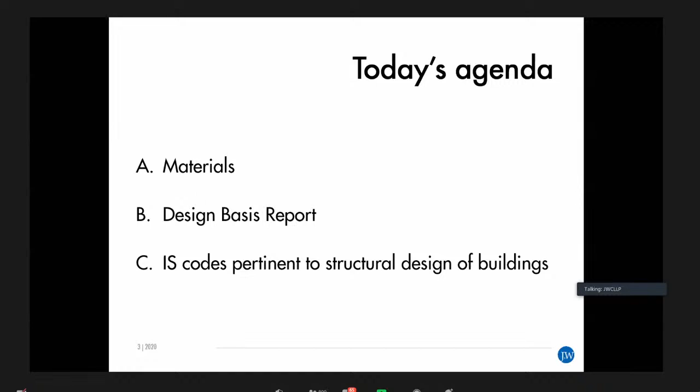As I had explained initially, we will restrict ourselves to the concrete and reinforcement.

For the sake of formality, we will define concrete: concrete is a mixture of cement, fine aggregate, coarse aggregate, which is mixed with water and obviously air. And of course, nowadays concrete is not complete without the mention of admixtures. Admixtures have become an integral part of concrete, and that is essential because, when I started working, say 40 years before, admixtures were hardly used, except for certain elements used for quick setting concrete.

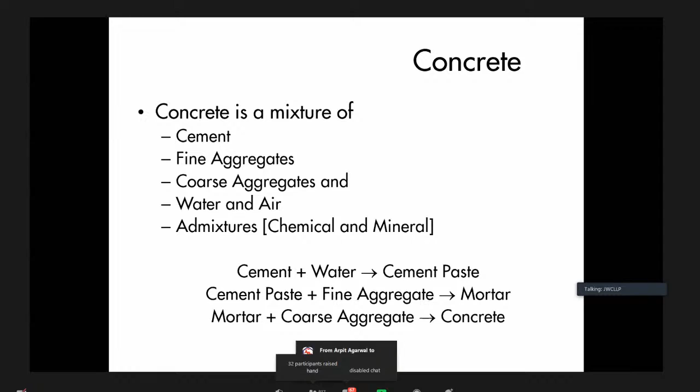So when we talk of concrete, we make it into three parts, or we will go step by step. When you add water to cement, we get what we call cement paste. That cement paste, when mixed with fine aggregate, gives a second stage element usually called in our engineering fraternity as mortar. And when this mortar is combined with coarse aggregate, it takes the form of concrete. So we use all three materials in different forms.

Only cement and water is often used for purposes of grouting. Cement paste and fine aggregate is used other than for structural issues, such as bedding material, rendering material like plaster, bonding material in masonry. Once we add coarse aggregate to it, we start getting structural concrete in place.

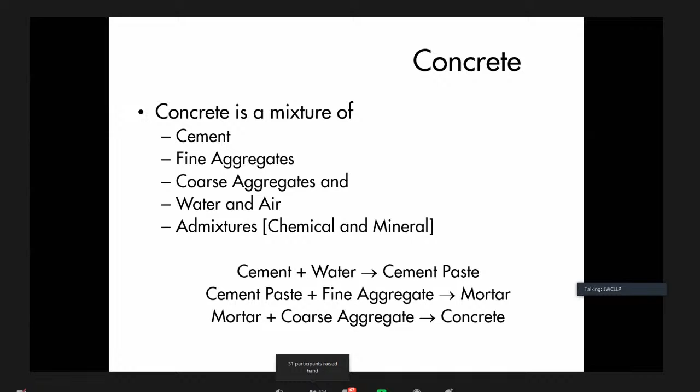The usually available cements are ordinary Portland cement. These are Portland cements which are actually called hydraulic cement. When we say it's a hydraulic cement, it means that when you add water to it, it will create an exothermic reaction, and that exothermic reaction will harden the cement paste. Cement essentially consists of limestone, clay, and iron ore, which is blended and heated in a kiln to a temperature in the range of around 1200 to 1500 degrees centigrade. This clinker is then ground in a cement plant to the consistency of a powder, and gypsum is added to control the setting time.

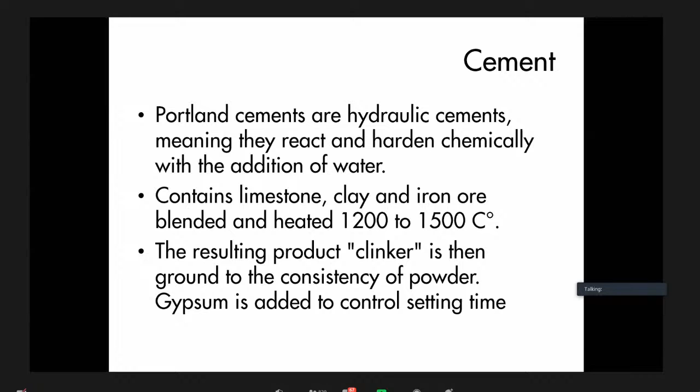It usually has a very fine particle, and the standard size is below 50 micron. The types of cement are listed in my presentation. As I said, we ordinarily use ordinary Portland cement in most constructions. We tend to use sulfate-resisting cement, mentioned in category D, where we are expecting certain attacks because of chemicals present in air, like chlorides and sulfates. Then we get slag cement, quick setting cement, super sulfated cement, which have applications in different sets of atmospheric conditions.

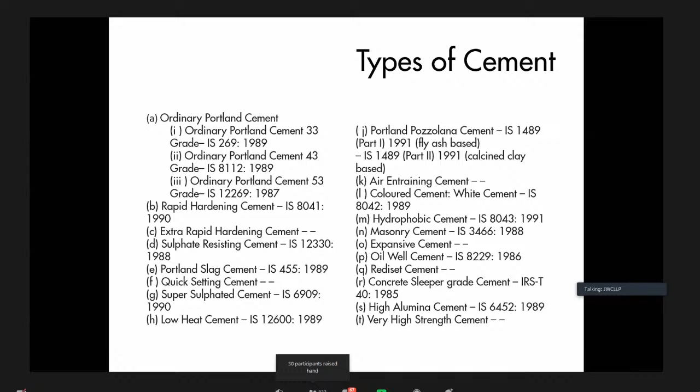Now, what is the role of cement? Before we go to the strength of the cement, let's understand the reaction of hydration. Here, C in the equation means CaO, S denotes silicon dioxide, SiO2, and H is obviously H2O. So there's a two-stage reaction, as given on the slide, and both reactions create CSH gel. This CSH gel is considered to be the hardened cement paste, which will impart strength to concrete. We will dwell on this in detail slightly later.

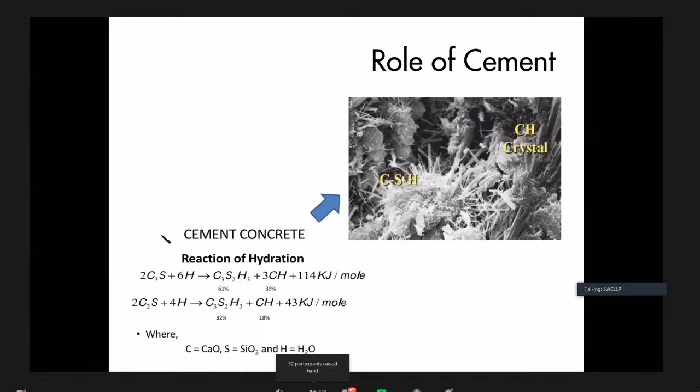Now, when the cement arrives on site, you need to ensure that it complies with the standards required. So we do field testing by taking it in hand, rubbing it, and checking the heat of hydration. A simple method is to take a fistful of dry cement and dip your fist into a bucket of water. What you should feel is a heat of hydration—a good amount of warmth in your hand when the cement is immersed in water. This ensures that your cement is capable of giving an excellent exothermic reaction.

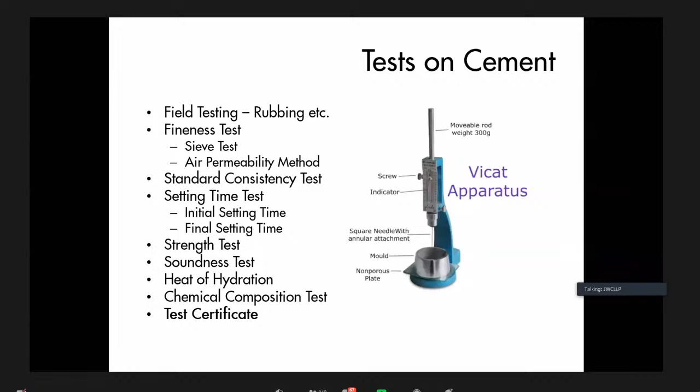Then we talk of coarse aggregate. The coarse aggregate, along with the cement paste, imparts strength to concrete. Usually, by weight, the content of coarse aggregate would be in the range of around 40 to 45%.

The standard definition of coarse aggregate is all aggregates bigger or larger than 4.75 millimeters in size. Obviously, there will be a restriction on the upper size limit. When we say 20 mm down-graded aggregate, the maximum size will be 20 mm. If we say 40 mm down-graded aggregate, the maximum size will be 40 mm. In most structural concrete used in buildings, we use 20 mm down-graded aggregate, meaning no particle size will be bigger than 20 mm.

Of course, the Indian standard allows up to 5% of particles to be bigger than 20 mm, but that's just a variation. Usually, the standard size of particle would be 20 mm and not less than 4.75 mm, which is classified as coarse aggregate. This is usually known as gitti or khadi in Marathi.

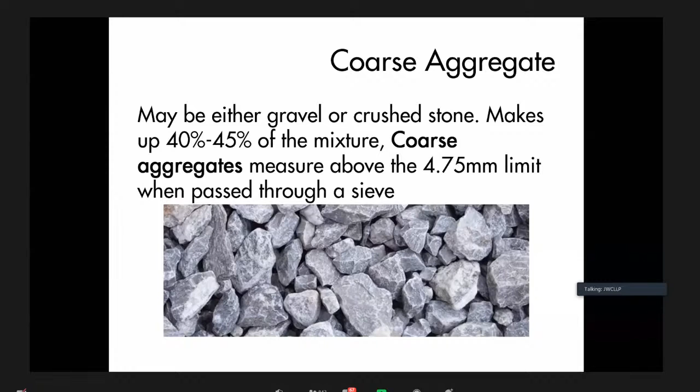The most important feature of coarse aggregate to keep in mind is observing the size and shape of the material. I'm not going through all the tests required, but importantly, your coarse aggregate should not be flaky or too much elongated. Because instead of getting a rounded or squarish aggregate, which is very difficult to get, if you get a flaky or highly elongated material, shear failure during loading of the concrete becomes inevitable.

When the concrete fails, it may not be by mortar failure, but by aggregate failure. And we certainly do not want the concrete to fail due to aggregate shear characteristics. So we need to entirely avoid flaky aggregates while using them on site.

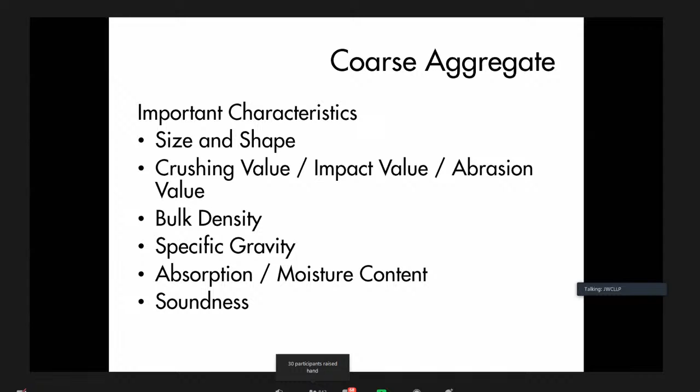These are the grading limits given in IS 383. For one who desires a career in concrete technology and mix design in particular, this IS 383 will form the basic foundation for coarse aggregate, and you will have to select your gradation of aggregate depending upon this table.

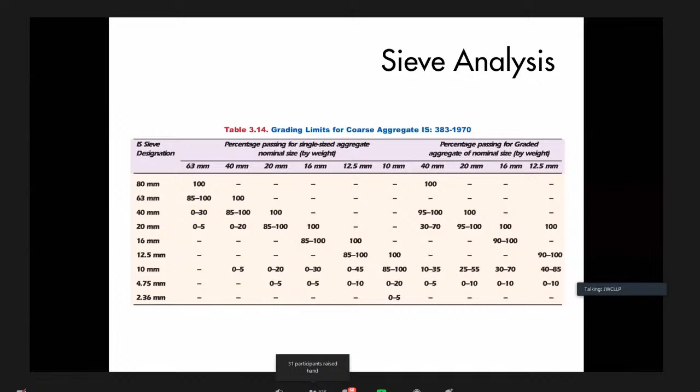I'll come to fine aggregate. Fine aggregate is what we usually call sand, and that will be between 4.75 mm down to 150 micron. Anything lesser than 150 micron, the quantum of that particle size below 150 micron will have to be limited, and it should not be more than 7 to 10%, because otherwise that will come in the form of stone dust. So we will have to necessarily control the particle size less than 150 micron.

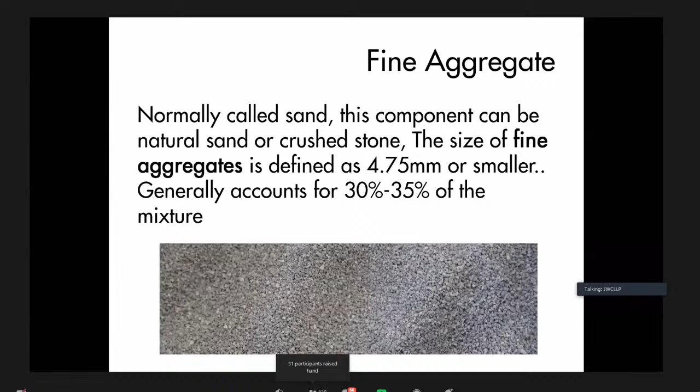These are the grading limits, again specified by IS 383, and these are the grading limits for all-in aggregate, meaning the fine aggregate and coarse aggregate put together. So these are the limits which have been specified by the IS code.

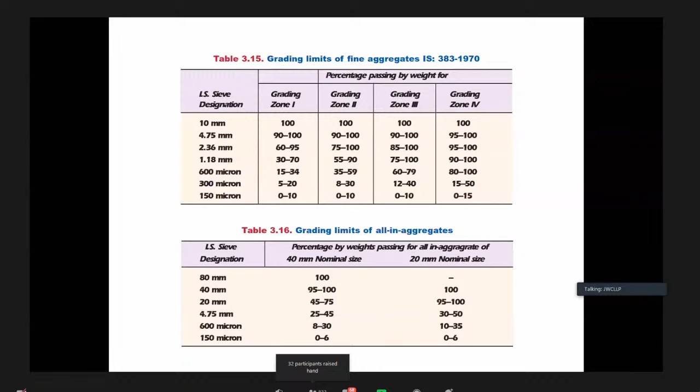The reason I'm talking about all this is that my observation in the field is that the best of structural engineers tend to disregard the material properties of concrete because they believe it is best left to the site engineer. It should not be done so, because finally, whatever best design you might produce, if you do not pay attention to the quality of material being used and the way in which it is used, the end result will not be desirable.

So most structural engineers and civil engineers working on site will have to be acquainted with concrete quality and concrete theory, because nowadays people have started saying that what is taught in college is not utilized in the field.

No, it's absolutely wrong. We tend to forget what is taught in college, and we tend to carry an impression on site that the practical field is entirely different. No, honestly, when you marry the practical field with the theoretical study that you have made, then it will render excellent results on site.

We usually use two kinds of terms: one is poorly graded aggregate, and the second is well-graded aggregate. It is very simple - if you have only coarse aggregate and cement, there will be a lot of gaps left in between which are filled by cement paste, and obviously this will weaken the concrete matrix against shear failures.

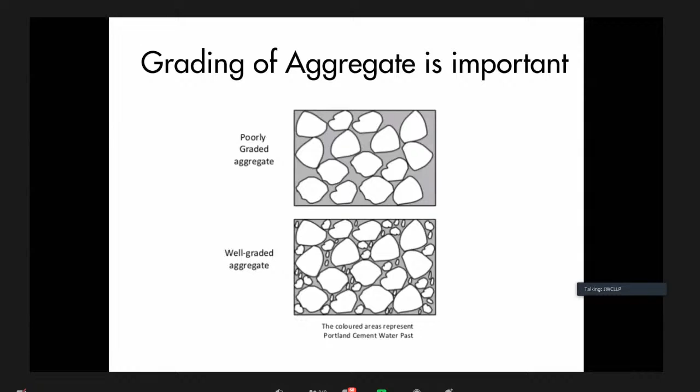I'll come to one more chapter. I'll be very honest with you - till 2000, in India, we were hardly using any mineral admixtures. Now, Sandip Polytechnic comes from Nashik, and Nashik is the basic source for fly ash, which is produced as a byproduct in the thermal power plant. It comes out of an electrostatic precipitator, which are now fitted to the boiler outlets. This fly ash was considered a waste material till 2000, but it has a fantastic advantage when it is properly and scientifically utilized in concrete mixing.

As a matter of fact, if you study the theory behind this, you will understand that mineral admixtures have now become part and parcel of the concrete mix, which will render a durable concrete. I will go a step further and say that ideally, one should now avoid using only OPC cement - OPC cement will have to be blended with one of these mineral admixtures. Why? We will see it in the next slide.

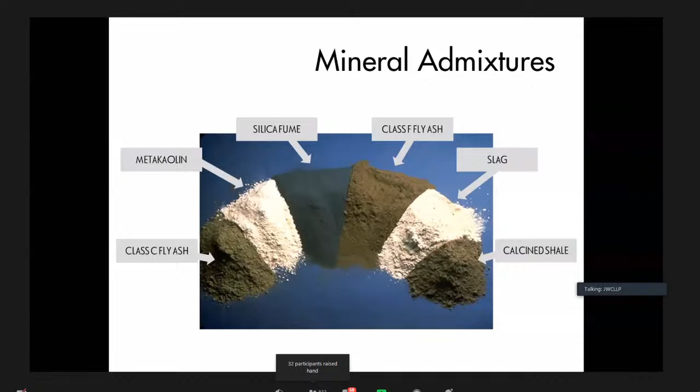Now we talk of silica fume. Silica fume is a much finer material, and this is usually used when we want to get a higher grade of concrete. That means fly ash would be good enough for concrete up to M30, M40, M50 grade, but if you want to go to a higher grade like M60, M70, M80, and gain that strength by controlling the cement - because as you all are aware, we are not allowed to go beyond 450 kg per cubic meter as cement content because of shrinkage problems - in this case, silica fume will come to our help, and with the same content of cement, because of the reaction that I will explain further, we are able to get a much better strength.

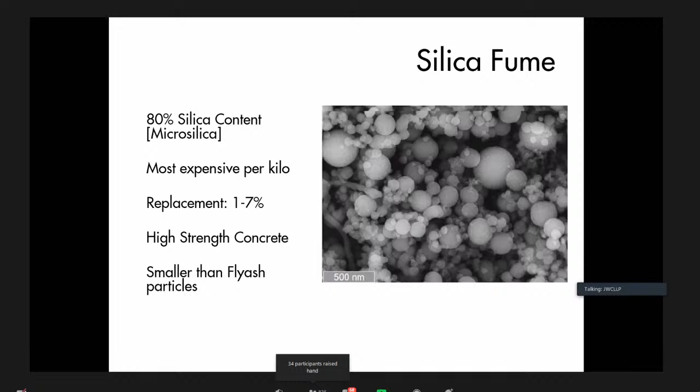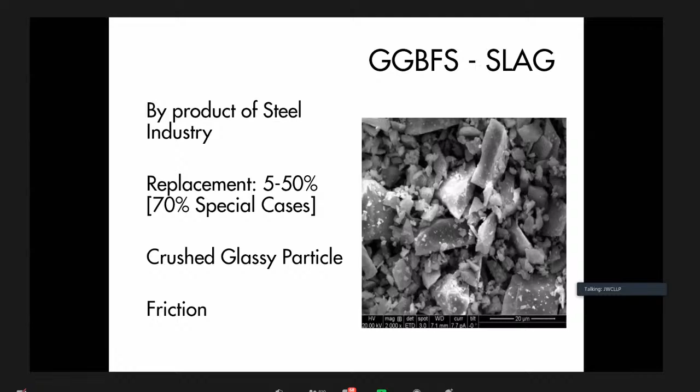This is another class of mineral admixture called ground granulated blast furnace slag, or GGBS. This is a byproduct from steel furnaces. It was also being treated as a waste material in the initial period, but it has similar properties to fly ash in that it tends to enhance the quality of concrete. These are various pictorial descriptions of how GGBS elements tend to mix with concrete.

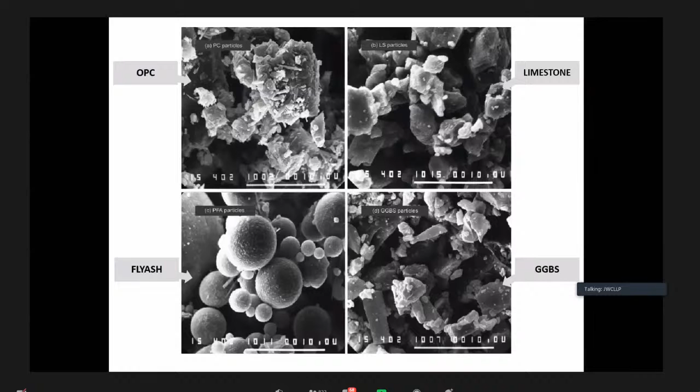Now friends, please pay attention to this slide because it will explain why we need to utilize mineral admixtures. The basic chemical reaction when we add water to ordinary Portland cement gives us a C-S-H gel, as we have seen in the first slide, and then we get a primary subproduct as calcium hydroxide, that is plain lime.

Now, whenever we are not using these admixtures, if you see a strengthened or dry concrete, you will find leaching in the form of certain white material coming out of concrete after 3 or 4 weeks. This is exactly the calcium hydroxide which tends to come out of various voids left in concrete. This lime eventually comes out and vanishes over time, leaving voids or pores in concrete, which makes concrete porous.

Now, what exactly will happen if the concrete becomes porous? That will allow water or moisture and other gases to enter the concrete. In a place like Nashik and Pune, we are comparatively better placed because we do not have saline conditions, we do not have sultry conditions, and we do not have chlorides or sulfates in the air.

But in coastal areas, in a place like Mumbai, Calcutta, or Chennai, where chlorides and sulfates are present in the air, these chemicals tend to enter through these pores. This air entrainment with chemicals eventually starts corroding the reinforcement within the concrete. Now, when this corrosion starts, as everybody knows, the reinforcement under rusting will expand in its volume.

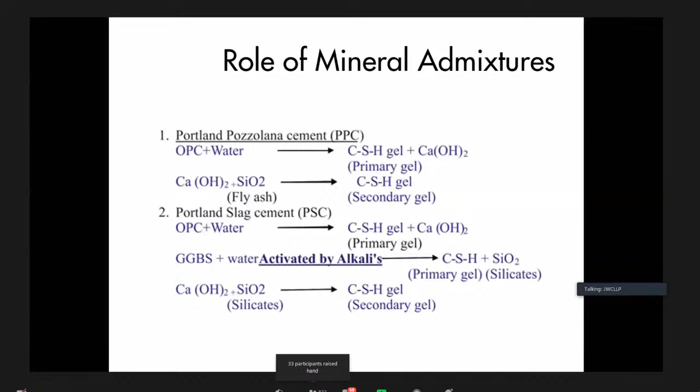Now we will go to further admixtures, such as shrinkage reducing admixtures, water reducing admixtures, foaming agents. You will understand their application as and when you go with some special kind of concrete required for equipment foundations, certain amounts of grouting, and certain high criticality turbine foundations, so on and so forth.

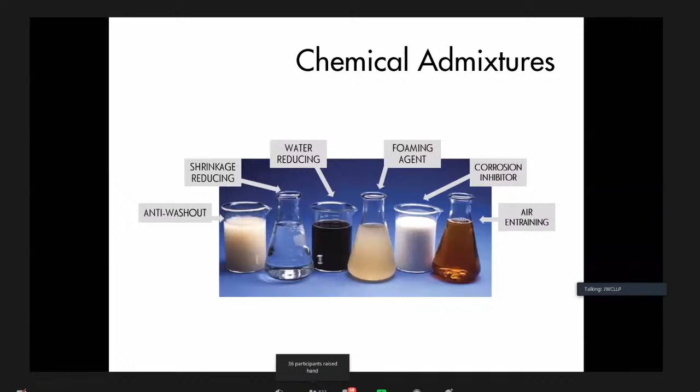Now we will briefly touch upon reinforcement, since we've covered concrete. Concrete, as you all know, is good in compression but weak in tension. So when creating a reinforced concrete element, we need another element which is strong in tension and shear. That's why this is a composite material, used in the form of RCC. All of you know that reinforcement comes in two different types.

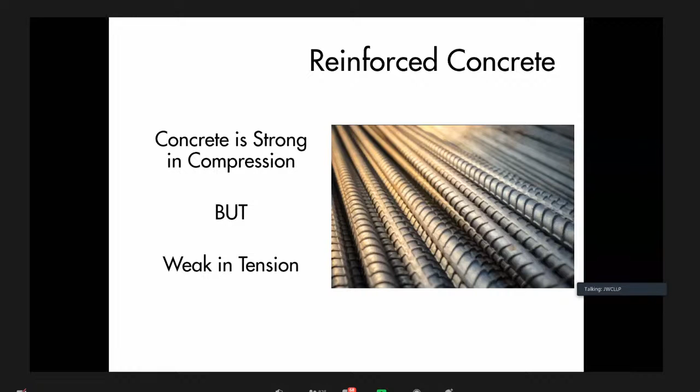When I was in college in the 70s, we didn't have high yield strength bars. I possibly did all my education with mild steel plain bars. While I was finishing education, HYSD started coming into the market, and that was always of the grade Fe415. But now we are fortunate to get grades of steel up to 500, 550, and 600.

You also need to understand that all of a sudden we should not start using 600 grade, because using this 550 or 600 grade means we have a yield strength of 550 MPa or 600 MPa. But to match that strength, we need to use it with a high grade of concrete. Please do not use 550 or 600 grade with a low grade of concrete like M30, M35, M40. If you want to go to 550D, for strain compatibility, you need to ensure you are at least going to M60 or M70 concrete.

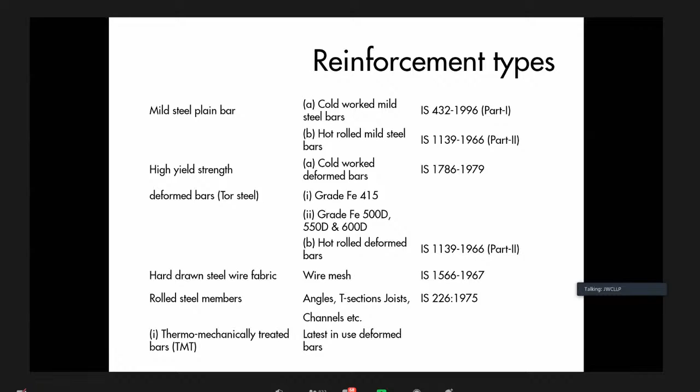While using the grade of steel, we have to also bear in mind that for Fe 500 and above, in order to retain ductility, we have to have a percentage elongation of at least 14.5. Because IS 1786 says that for Fe 500, the acceptable percentage elongation is 12%. But when we have to design the structure in seismic areas for the ductility requirement, our percentage elongation has to be 14.5% minimum. So that is something we have to bear in mind.

And usually it is rendered by this thermomechanically treated, TMT category reinforcement. It's a different metallurgical treatment, but which gives you a higher percentage of elongation.

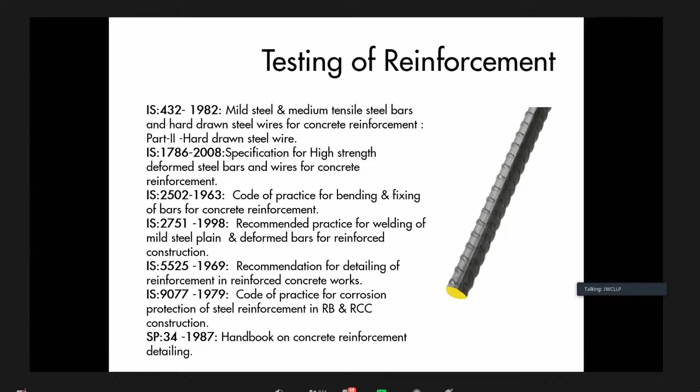So this is a brief touch down on the materials part that we essentially, as a designer, need to know. Obviously today I'm not going to concentrate on the construction aspect. I am going to restrict my presentation to the design aspect, and that's why in the materials part, I have dwelled only upon the properties of the material that we have to bear in mind in order to fit into the correct design procedures.

So what I am doing, all of you must have gone through various IS codes or must be in the process of going through various IS codes. So I am not making a particular reference to one IS code, but referring to all the IS codes together when we take up a particular design of a building.

Now, for the sake of example, I have picked up one of my projects where the design is in process. And you will ask me why this. As I said, I have purposefully picked up a building which is 240 meters high. Obviously, I know not everybody will get to design a building of this kind. But if your horizon is wider, if we start thinking in terms of tall buildings in the first place, then you will start thinking on various different aspects of design much more purposefully, because a shorter building of 5 or 6 stories might not have so many complications.

Our next is IS 875, Part 1, Part 2, Part 3, and Part 5. All of us know that when we talk of a building, we design it, we put strength of concrete, we put reinforcement, because it is subjected to inertia forces, gravitational forces, and lateral loads like seismic and wind. So we need standards which define various loadings that we should adopt.

There are various loading standards. IS 875 Part 1 gives you the unit weights of each building material. IS 875 Part 2 gives details of the imposed loads, or what we commonly call live loads. Then Part 3 gives the wind loads, which tall buildings are required to be designed for, and Part 5 gives the special loads. These are the four important codes we need to go through.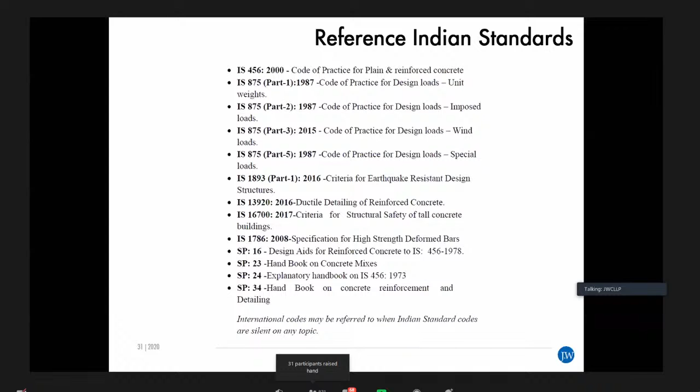And then you will have to create a description. So that's why I will go to the earlier slide, that you will have to define the building. If you see the functional requirements, this building has details that it has one basement floor of particular height, then a ground floor, then a first floor, then second floor of different height, which is used as a service floor. Then there are third to 44th floor, which are typical floors, residential floors.

Then there are fire check floors. There are different clubhouse floors. So when I'm saying I'm preparing a statement, your statement per se should be able to speak or give a volume of the data in terms of that building. So this is something which is essential to be created so that anybody as a third party going through your design basis report is able to visualize the building.

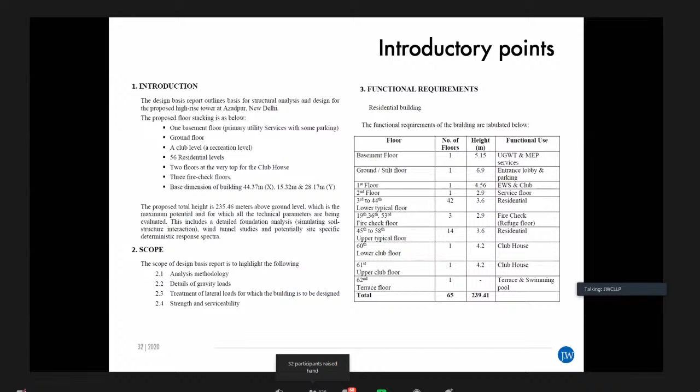So this is the framing plan that we talked of. This is just for the information sake. This is the stacking plan, how the building will look in section. And this is an architect's view in terms of its perspective.

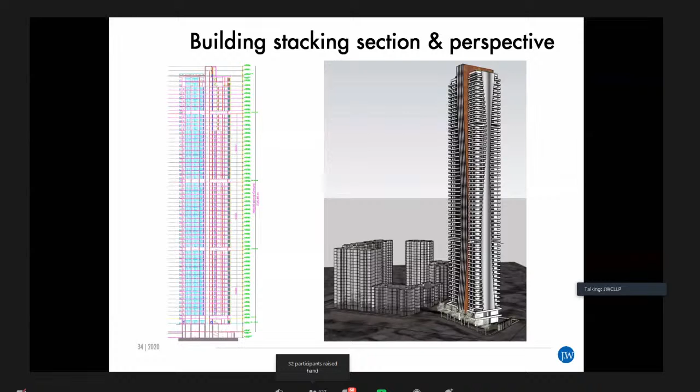Now, these are the design criteria. As we had talked about materials, in the design basis report you will have to specify the kind of cement that you intend to use, the aggregate that you will intend to use, what is the maximum aggregate size that you will employ, and what admixtures you intend to use.

For a building of this nature, your grade of concrete will be M70, as you see on the slide. For M70 concrete, the correct selection of mineral admixtures as well as chemical admixtures is most important. That's why you need to examine the appropriateness of the admixtures you will utilize, and that mention has to be made in the design basis report.

And the reinforcement grades also, because here you will have a wide choice. You are talking of a very tall building, so you can go from FE 415, FE 500, FE 550 to FE 600. So here we had made a choice of using 550 and 415 grade materials, and that is something we will list out.

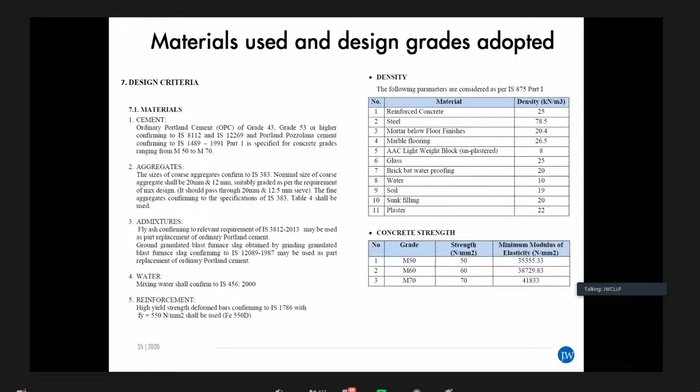Now obviously the problem will come. So far we have not talked about foundations. I will just briefly touch that a building will have a very high capacity requirement in terms of the safe bearing capacity from the soil, and unless you have an extremely hard rock able to give capacity in excess of 200 ton per meter square, otherwise you will be required to go for piles.

Obviously this building that we are designing in Delhi has a lot of alluvial deposit, so there is no question of getting a hard strata. So we had decided to go in for piles. We have defined the piles, the reinforcement, the link beams and the shear walls, and the floor-wide distribution of various grades of concrete can also be shown.

Again, I'm emphasizing that this design basis report is most important, because this documentation will speak about the details in terms of the thoughts you have given to designing a building. That means somebody who has not been part of the design team, if handed over this document, should be able to visualize the way in which your thinking process has gone about.

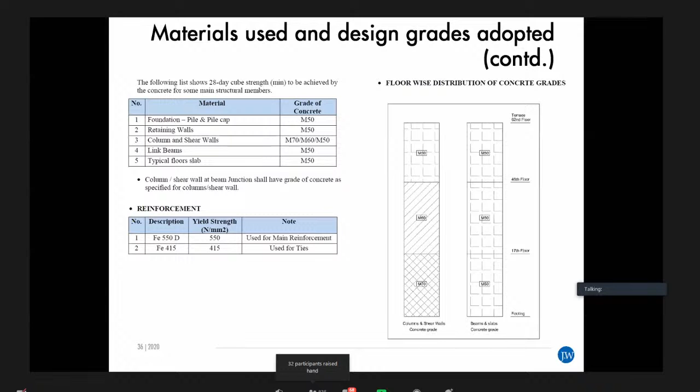Now this will give you various concrete elements and the serviceability conditions and the exposure conditions. So what are the nominal covers that we are adopting, and what are the exposure conditions that we are talking of? And the fire rating is most important.

That is one part which was previously being ignored, but is now emphatically included in all design basis reports. With so many frequent, unfortunate incidents of fire, the fire rating of a concrete element is a most important part of your design basis report, and that is something you should always include and pay adequate attention to.

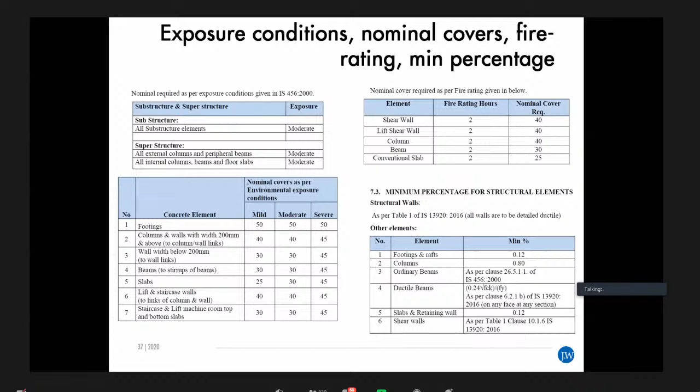This is some minimum percentage of the reinforcement that we will employ in our elements. And now we will have to create a note when we are designing a building, you will have to create some kind of a note.

Of course I have not burdened this presentation with the kind of note that we prepare, but what I'm saying is that we will need to prepare a clear note on the philosophy of the structural framing - that means the way in which we have visualized this building will resist.

As I have been taught in my early years, it's very easy to design a building. Somebody who understands how a building will fail for a given loading condition, if he knows the mode in which the failure will occur, the job is very simple. You need to strengthen those portions which will become critical or which will become a weak link - those weak links you will have to eliminate.

So your structural framing will have to be done in such a way that you are able to establish a very clear load path without any unnecessary gimmicks, so that the gravity loads are transferred from the top to the foundation. And not merely gravity loads, I'm talking of the lateral loads also.

Here and after in my presentation, when I'm talking of lateral loads, we have to keep in mind that I'm talking of either earthquake load or seismic load or wind load. Obviously we will not assume seismicity and wind event to act together, so it is either or - either the structure will be subjected to seismic load or the structure will be subjected to wind load. So that is something for which we will have to establish a clear load path.

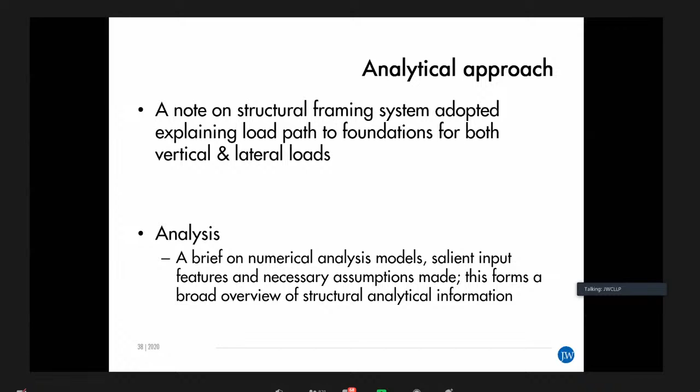Usually, for the sake of correctness, each floor will be subjected to different kinds of loading. Your parking floor will be subjected to different live load, your commercial floor to a different live load, your residential floor to a different live load, your workshop floor to a different live load, your service floor to a different live load. So floor-wise, you will have to enumerate the kind of loading that you have assumed.

Second is what we call superimposed dead load. What is superimposed dead load? It's kind of a filling that we make in a toilet block. You know the toilet floors we leave sunk, then do the waterproofing, fix the fixtures, and then fill it up. So your toilet loads could be higher. There could be 200 millimeters of filling.

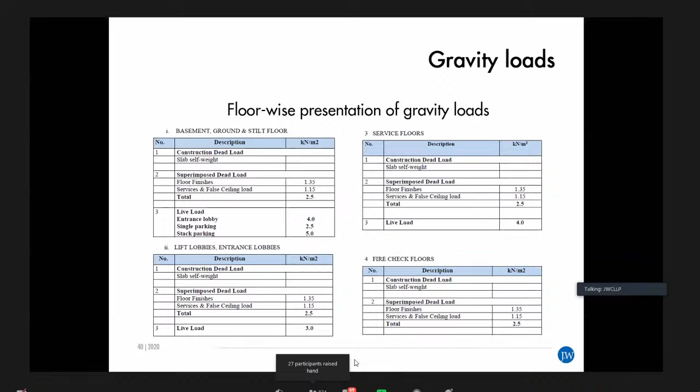And obviously live loads I have explained to you earlier. Now these are floor-wise presentations of the gravity loads - dead load, superimposed dead load, and live load.

Obviously then the slabs will have to be designed for fire tender movement, because most buildings have podiums and fire tenders have to be allowed to move around to take care of firefighting requirements. Those firefighting slabs are designed for much higher loads, and that tends to get missed out because architects and fire consultants do not specify the fire path. So we need to ask architects specifically to tell us the fire path, so that we are able to design those slabs for higher loads.

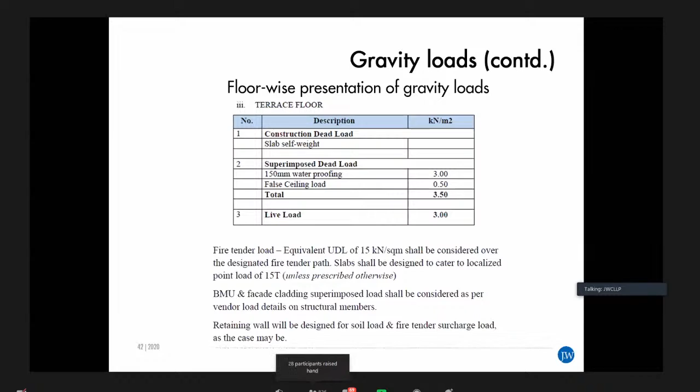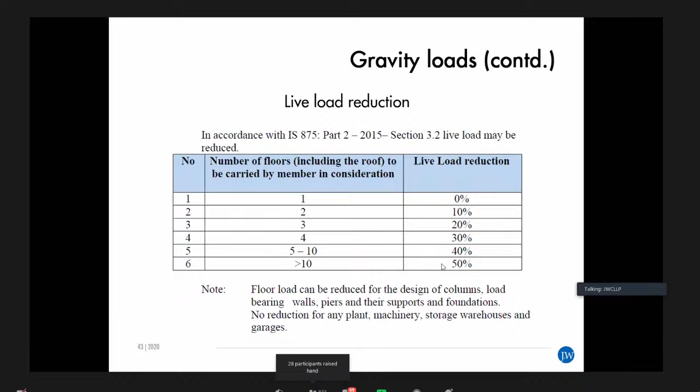IS 875 Part 2 always allows live load reduction. Even though we consider full live load, it is assumed statistically that when the building is complete, all floors may not carry the full live load. So depending upon the number of floors in the building, you are allowed to reduce the live loads assumed in your calculation. These are the percentages of live load reduction you need to account for optimal design of a building.

When it comes to partition wall loads, you will have different kinds of materials: conventional bricks, lightweight bricks, dry walls, Shera walls. You need to define what material you're using. If using an ordinary brick, you'll also have to ask whether you're doing a normal neeru finish plaster or only gypsum, and what the thickness of the plaster will be. Accordingly, you utilize the loading pattern onto that masonry so the proper load is accounted for.

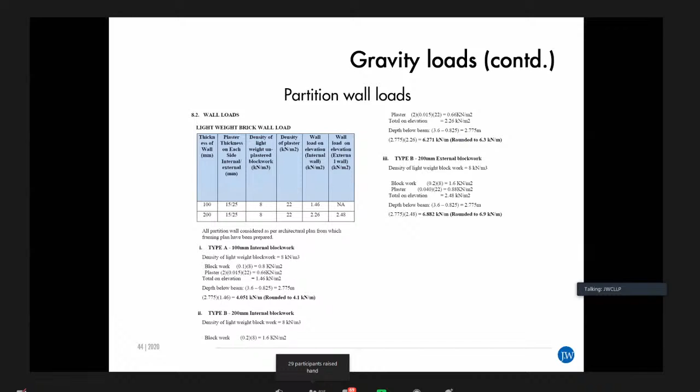This is something we had referred to already, so we'll skip it. This is all about gravity loads. Now we will come to part 1 of the lateral load.

We are going to briefly talk about wind loads. For the wind category, this is part of IS 875 Part 3, 2015 code. The country is divided into various zones where the basic wind speeds are defined. For our consideration, Mumbai is in a zone of 44 meters per second as the basic wind speed.

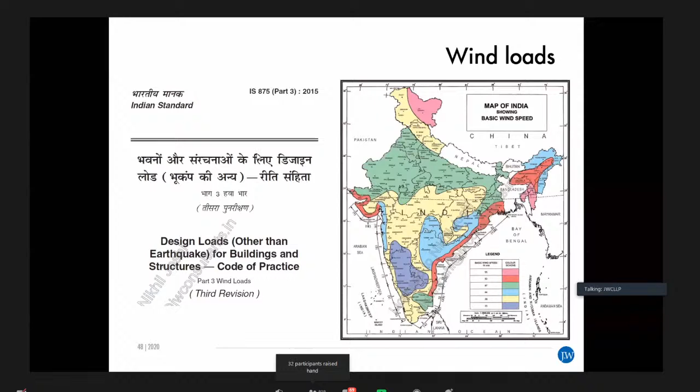If you come to Pune and Nashik, that would be in the range of 39 meters per second. If you go to Bangalore, that could be 33 meters per second. Depending upon various wind data collected over years, this is the wind climate diagram for our country as a whole. So this is the basic wind velocity for this project. Obviously, Delhi has a much higher wind velocity, which is 47 meters per second.

Now, going through the code, there are various factors. K1 is called the probability factor, K2 is the terrain roughness factor, K3 is the topography factor, and K4 is the cyclone factor. These basic wind speeds given by the code have to be modified further by multiplying all these four factors. This gives us VZ, the maximum design wind speed, calculated by multiplying VB, the basic wind speed, by K1 into K2 into K3 into K4.

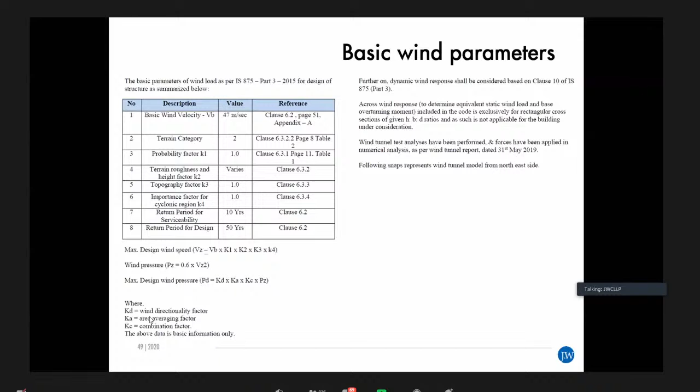Once you arrive at this maximum design wind speed, you get a wind pressure by the formula PZ equals 0.6 VZ square. This is the maximum pressure you will get. This has to be further used in calculation with the effect of force coefficients. Depending upon the geometrical configuration of the building, you work out various force coefficients, called CF, based on these parameters. Then the basic wind pressure is calculated and applied throughout the height of the building.

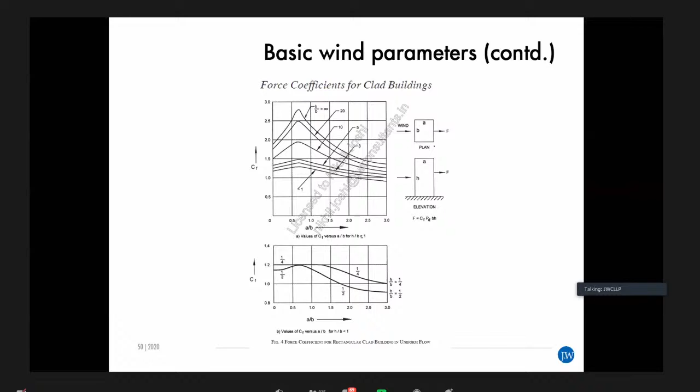So this is the calculation of wind speed. Now, how do you do the analysis with this? In your StaadPro or ETABS model, you apply this on the exposed surfaces of the building in both directions, meaning on all four surfaces, and analyze it through the numerical process. This is all done by way of a static wind speed, because the VB, the basic wind speed, is based on a 3-second gust, but that is still a static wind speed.

Now actually, the dynamic wind response also needs to be worked out, and this is not required for all kinds of buildings. For certain sets of buildings, this is required to be done. The dynamic wind response is worked out for a building with a particular aspect ratio or a particular frequency of the building. Those details we will skip for the moment.

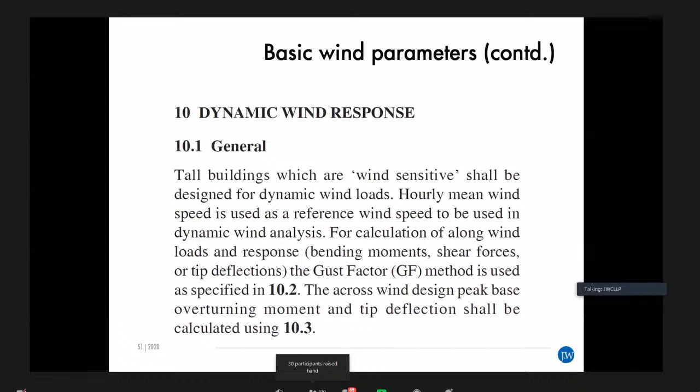Now, in case of a taller building, I'm just introducing a concept that for taller buildings, the calculations of the force coefficient, the Cf factor, and the gust or dynamic response become too approximate because buildings are not necessarily rectangular in nature alone. Buildings can have different shapes, different sizes.

So for a building of this nature, we go to the wind tunnel. This is an extension of aeronautical engineering. That means we create a building model in a given material.

These building models are usually created to a scale of around 1:300 to 1:400, and they are placed by modeling the surrounding proximity analysis. That means we also create surrounding obstructions in the form of small dumb models of the building surroundings, and these are placed in the wind tunnels.

And then these wind tunnels have a capability of creating wind speeds of the desired pressure, and these are created at different angles. That means if you consider a 360 degree pattern, where this is 0 degrees, it will go on creating wind at different angles - 10 degrees, 20 degrees, 30 degrees.

That means if this is considered quadrant 1 in our XY coordinate system, this is quadrant 1, this is quadrant 2. So we create, at every 10-degree interval, different wind pressures through a wind velocity equivalent to basic wind speed, and then through the instrumentation on that building, we measure the responses of the building. This is called the wind tunnel study.

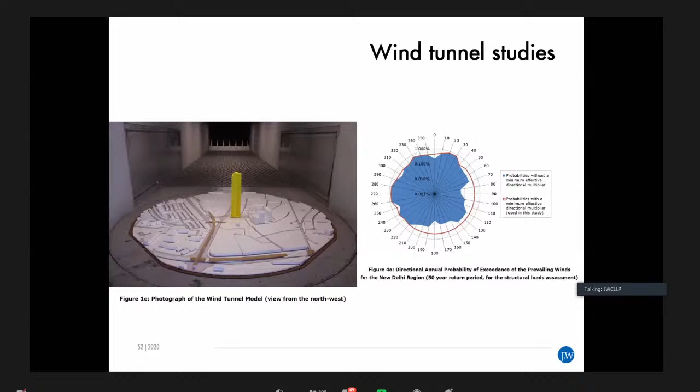And what it will give you is Fx, Fy, and Mz. That means force in X direction, force in Y direction, and the torsional moment about the vertical axis.

Now, this is usually not obtained through your codal compliance. This can be obtained because it is the most critical parameter, and it can be obtained only through wind tunnel analysis. You have to bear in mind that in your normal numerical type calculation, this figure is not available, and this is the most important figure to understand the behavior of a building against wind.

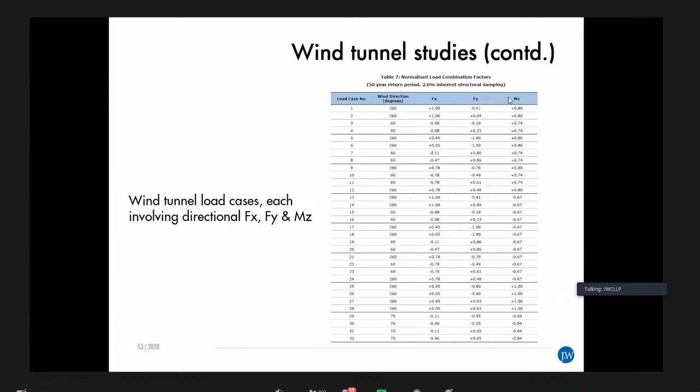And then there are various accelerations that we have limits on. That means when the building is subjected to wind, it is not so much the strength but the serviceability criteria which come into picture, wherein people perceive certain motion. That means in case of extreme wind, people feel the swaying motion.

In an extreme case, we had the Amphan cyclone which struck the East Coast just last month, where wind speeds were in the range of 135 to 150 kilometers per hour, and there people experienced swaying motion at the top levels in a tall building.

Now, these are giving various accelerations - the accelerations allowed for a 1-year return period, a 5-year return period, a 10-year return period. These are part and parcel of various international standards which we have to comply with.

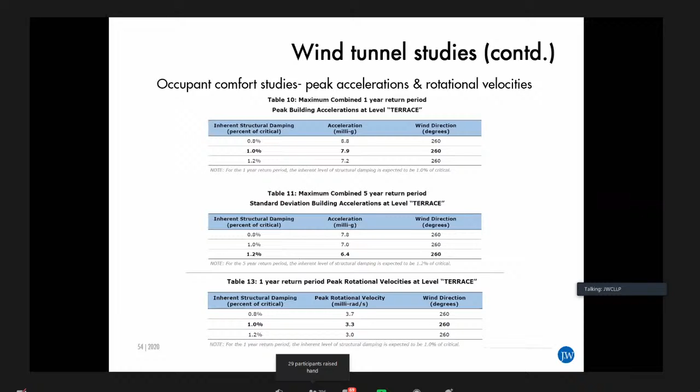Now, this is about wind. I know I'm on to the last leg, so another 10 minutes I will take. We will talk of the earthquake.

Now, in Nashik, Pune, Mumbai, we are sitting in zone 3, which is the seismically active zone. And as I had mentioned earlier, in this seismically active zone, it is not only essential that we need to have our design compliant with 1893, but we'll also have to compulsorily comply with the ductile detailing conditions.

Now, I was trying to explain ductility. Ductility in a structure is imparted by the reinforcement placed in the concrete, and also the configuration of reinforcement or method of placement, the way in which you strengthen your joints. Ductility is defined as the capacity of a structure to deform under seismic conditions without reaching collapse.

That means when I was saying that we are talking of a semi-probabilistic event, we do not know to what extent we will have damage. But we need to ensure that our building is designed in such a way that in case of an extreme event, the building might suffer damage, but it will not suddenly collapse. That means the occupants will have adequate time to escape during or after that earthquake event, and that's what we call the ductility of a building. The building has to be adequately safe so that occupants are able to escape within a reasonable amount of time.

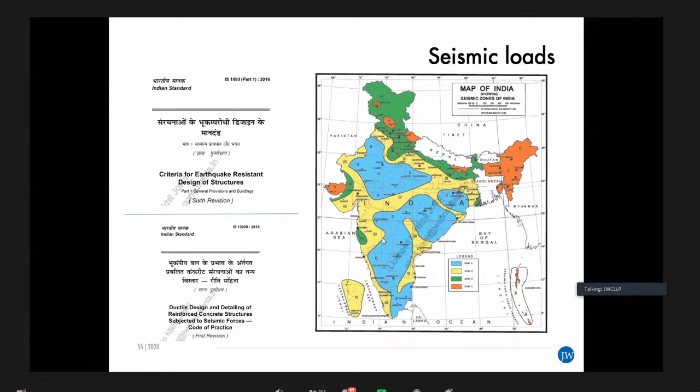Now, obviously, in the textbook, you must have learned that what we do in our seismic engineering is a force-based design, even though earthquake is a deflection-based activity. In case of wind, it is the force which is applied which creates the forces in the building—it is the external wind force. In case of an earthquake, we need to remember there is no external force.

What happens is the displacement of a building. When the earthquake occurs, your soil starts moving. When the soil starts moving, it displaces the foundations which are resting on the soil, and those displacements create inertia forces. But to make our theory simpler, our codes have employed till today a force-based design.

That means we define the seismic force for which the building needs to be designed. So that force is defined by this formula. This is all clear to everybody, by which we work out the base shear, what we call VB, which is this AH coefficient multiplied by the seismic weight of the building. I will not go into the details of how to work out the seismic weight. Obviously, these are the minimum earthquake horizontal forces which we have to make applicable.

This is a new addition to the code, in the sense that if you are in zone 3, your seismic force will have to be a minimum of 1.1% of your total seismic weight. That means if the seismic weight of the building is 1000 kilonewton, then you will have to have 1.1% of that 1000 kilonewton as the horizontal seismic base shear which is made applicable.

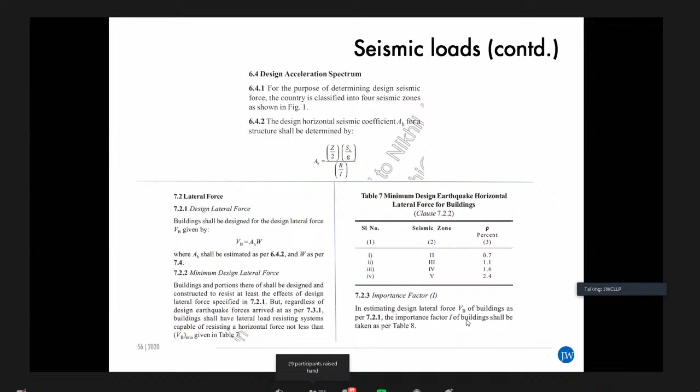Now, the importance factor is the second important thing where the revision has happened. Previously, we used to design all residential buildings for an importance factor of 1, meaning there was no magnification of the importance factor. But now, for all residential buildings with more than 200 occupants, we need to design for an importance factor of 1.2. That means the new code has enhanced our seismic force by 20%.

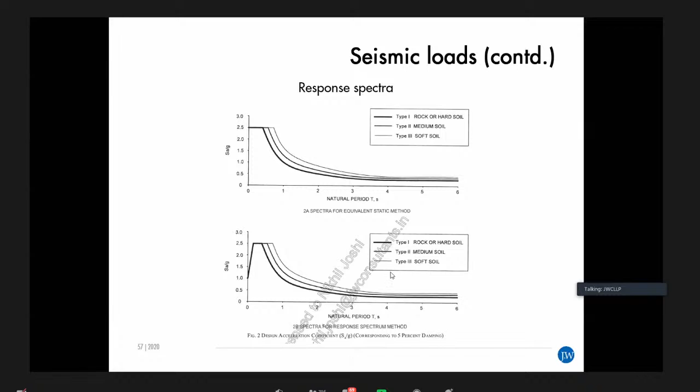Now, these are the various response spectra that we refer to. This is the spectra for the equivalent static method, which is what we usually utilize in our ETABS model. This is the spectra for the response spectrum method. And these are the intensities—as I said, Nashik, Pune, Mumbai are in zone 3, so this is 0.16, which is called the moderate zone. This is the factor which will be made applicable, and you will have to establish all these calculations.

That means you will have to work out the time period of a building. The time period is worked out in two fashions: one is by numerical methods, wherein you work out the dynamic time period, and the second is the code-based method. That means you need to work out the time period formula on the basis of where you have shear walls, using this formula. As you know, the lesser the time period, the higher—if you see on this graph, the time period and SA by G, that is spectral acceleration, are inversely proportional to each other.

Higher the time period, the lesser is the force, and lower the time period, higher is the force. So you will have to design the building for the minimum of the two, meaning the static time period, and whatever our ETABS analysis gives us is the dynamic time period. You design for the minimum of the two values of time period, which gives the maximum base shear.

Now you will have to properly select the response reduction factor. This is most important in terms of the behavior of the building. For buildings with shear walls, as we have proposed, the response reduction factor is 4. If completely moment resisting frames with shear walls, the ratio is 5. And for a flat slab building, the response reduction factor is 3, meaning your seismicity will be higher.

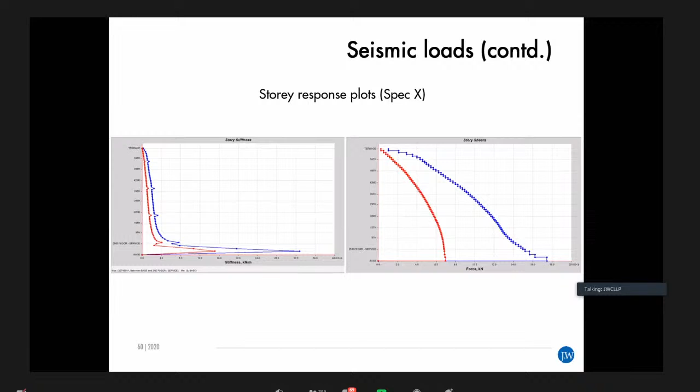So here I complete my presentation. Thank you very much, with a question - any questions? If the facility is there for question answer sessions, I would welcome it right now. Thank you very much, sir. Very nice session. I hope it was not boring. No.

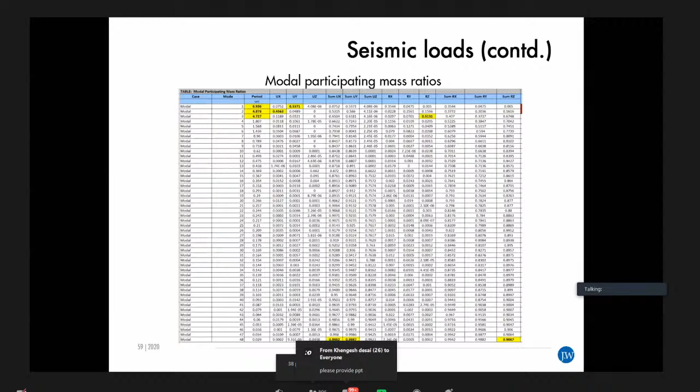Other than that, there are three formulae given in the code. One formula is for structures having no infill walls, only moment resisting frames, and that time period is given by 0.075 h raised to 0.75 - that is for structures having only moment resisting frames without infill walls. The second formula, given for structures with combinations of moment resisting frames and shear walls, is time period equals 0.09 h upon root d, where h denotes the height of the building, while d is the depth of the building in plan in the direction of the force.

And the third formula, which I mentioned in my presentation, applies when the structure comprises basically shear walls. So depending upon your type of structure, you need to work this out. This is what we call in common language the static time period of a building. So these are the two methods, and you have to pick up the minimum of the two, the static time period or the dynamic time period. Needless to say, the static time period is always lower than the dynamic time period.

Next question: why are we not considering wind load and earthquake load at the same time? It is conventionally assumed that these two natural occurrences will not happen at the same time. Severe wind conditions and severe earthquakes are statistically and probabilistically most unlikely to occur at any point of time. It's a standard convention adopted worldwide that a severe storm and earthquake will not happen together, and that's why the events are considered in isolation.

Next question: what time period do we have to use for masonry walls? It's difficult. You will have to model the masonry walls with the proper modulus of elasticity. But the problem is going to happen when you model a masonry wall, because there are going to be windows and doors as part of it. Those doors and windows have to be modeled properly, because if not, you will get erroneous calculation of the time period.